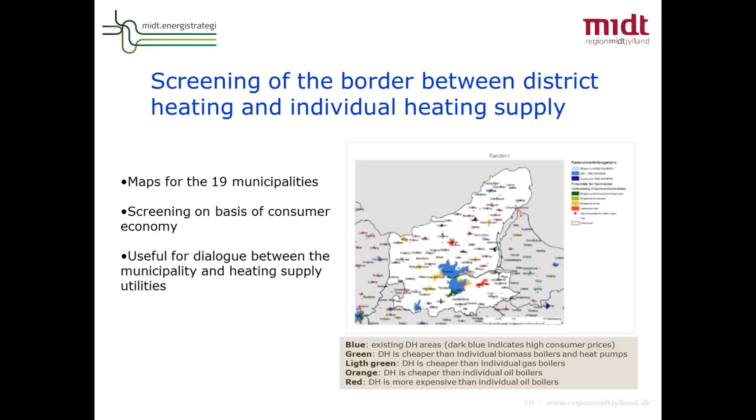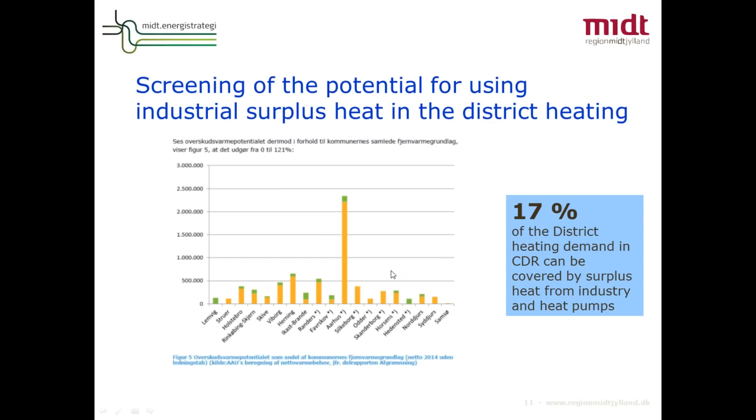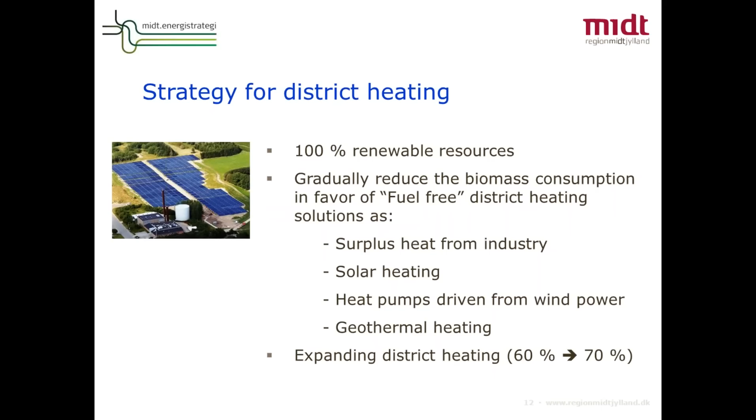You can also see in the strategy that we would like to expand district heating from 60% today up to 70% of the total heat demand within the region. We already have a lot of district heating, but based on the analysis and screening on consumer economy, it could be good to raise it further up to 70%.

The whole strategic energy project was called Spatial, and the conclusion is that if we take action as we have formulated in the strategy concerning district heating, wind power, etc., we will by the year 2035 reach a share of renewables of 70%. If we include wind power produced within our region but exported outside, we'll raise that share to 90%. This is quite good, and it is based on known technologies and mainly local resources, so I think it's quite interesting.

Another example of how we can manage to work as a region with no formal authority or role: we can facilitate, we can put people together, organizations together, municipalities, energy supply companies, and then we can facilitate this common energy strategy work.

Another example here is a new analysis we have made in the area of Viborg, because Apple is right now building a new large data center, and they have a lot of surplus heat from this data center.

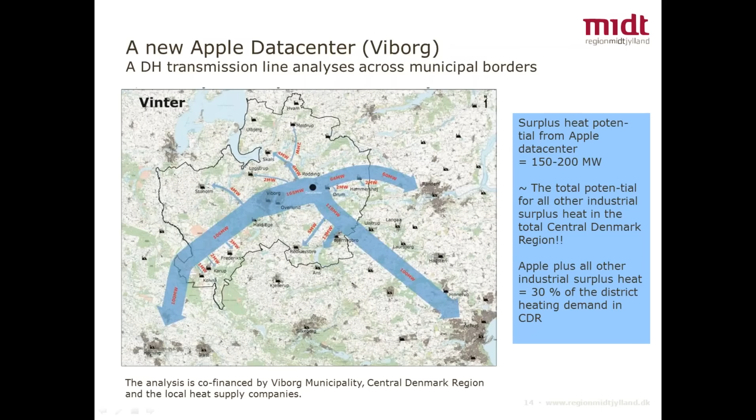If this heat should only be used in the city of Viborg, the closest city, they would perhaps be able to use 25% of the potential for surplus heat. We would like to use as much as possible, so the region has co-financed a transmission line analysis to investigate if some of the surplus heat could cross the municipal border to Randers, Aarhus or Herning, where they have large district heating systems. This is another example of how we as a region can help, since the municipality of Viborg alone does not right now have interest in using surplus heat in other municipalities, and that is why we as a region co-finance and take our part here.

Our latest developed project: the region together with 24 district heating companies has made an application for financial support from the EU. These 24 district heating companies are all fired by natural gas, and they are planning to invest in more renewable technologies within the next 3 years. To do so, they need technical assistance, calculations, etc., and together we have made this application for financial support to the technical assistance. We hope and expect that we can start this February or March, so we can help them increase their share of renewables, which will also increase the total share of renewable energy within the region.

This was what I wanted to explain to you about how we do work as a region with no formal role, but still we're succeeding with this way of facilitating and collaborating with important energy partners. Thank you very much.

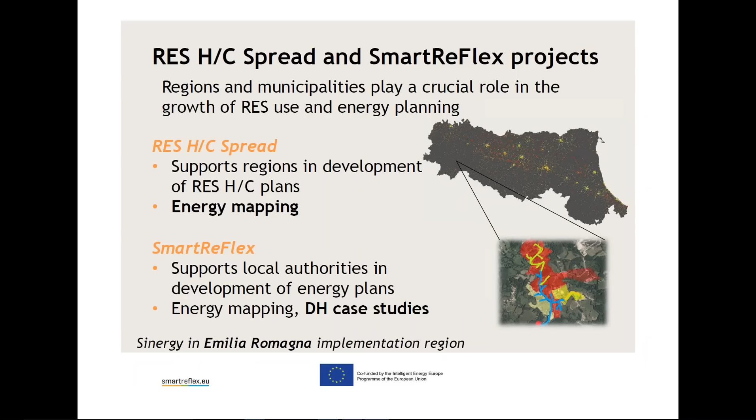I'm going to present briefly the results of this project, in which I was not involved, but which we used for our case study analysis.

That is the energy mapping of the region. The Agency for Environmental Protection and Energy, ARPA, developed maps of demand, of existing energy sources, and of potential renewable energy sources to be used.

Thanks to the overlapping of these two layers, it was very useful to find the most suitable areas in which renewable energy source plants could be built, particularly district heating.

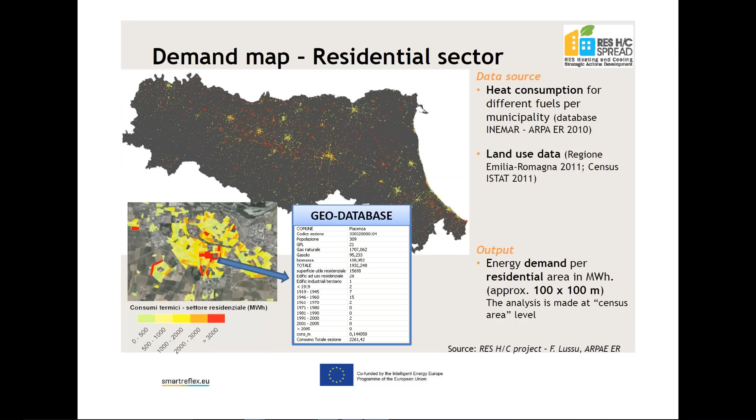What you are seeing now is the map of demand in the residential sector. The color scale, from green to red, highlights the energy demand intensity, made through analysis of fuel consumption per municipality, afterwards redistributed per the floor area of the residential sector.

The same analysis has been done for the tertiary sector, with the addition of the important anchor load buildings—buildings, particularly public buildings, with very large and steady heat demand that are really interesting as consumers for district heating plants.

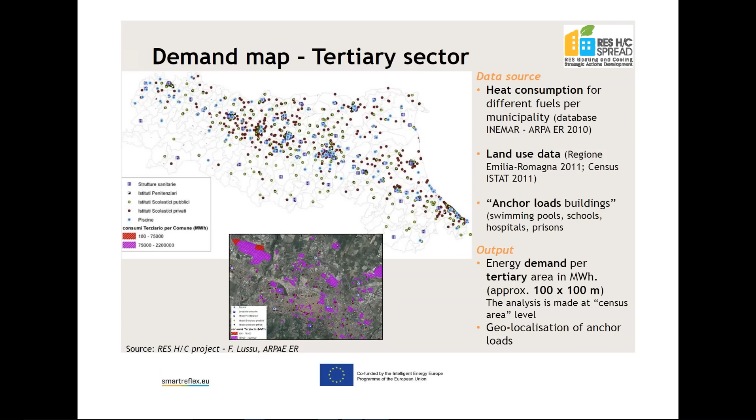Basically all industrial activities, companies and energy production plants have to ask for authorization from the Environmental Protection Agency, and to monitor their pollutant emissions and energy consumption every year.

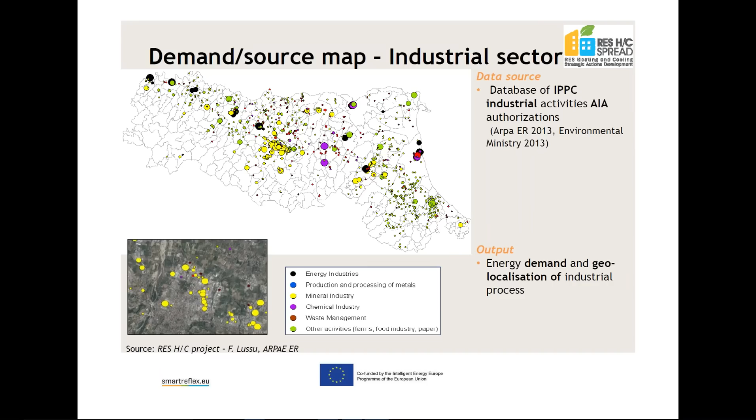Industrial activity has lots of waste heat that could definitely be recovered thanks to district heating.

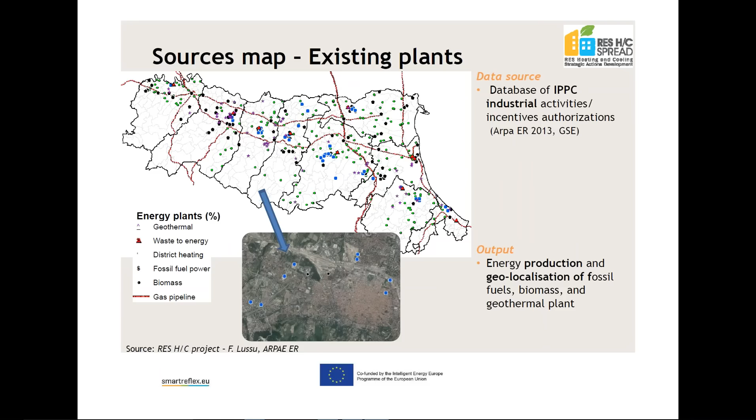As I mentioned, a map of the existing plants was made, and the last effort was to map potential new energy sources, particularly renewables, that could be used in the heating and cooling sector.

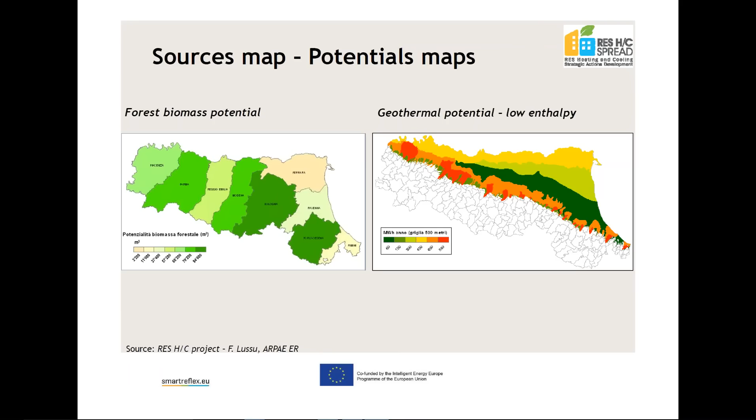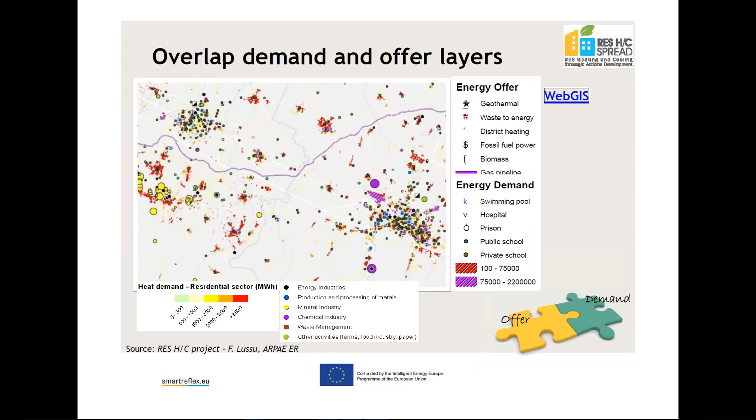So after obtaining all these maps, overlapping them and looking at local scale, it definitely shows up some areas in which synergy between demand and possible new energy sources could be very interesting and exploited thanks to district heating. So we used this data in our project, SmartReFlex, to properly size and analyze some pilot case studies.

Some case studies of pilot plants that we hope will really be implemented after our analysis. I would say I'm sure about that.

What I'm going to show you now are two examples of the case studies we have done. Looking at the mapping, you can see the mapping of the region at a local scale, a sort of zoom of the result of the previous project, here in this small town.

That is Mirandola. The case is about the extension of an existing district heating system, in which the local authority, together with the utility running the existing system, is planning to extend the district heating and use renewable energy sources in order to reduce their dependency on fossil fuels and on their unpredictable price.

This is quite a nice example of integrated urban planning and energy planning. After that ruinous earthquake affected the area in 2012, the city is undergoing a big renovation of the damaged areas, especially in its historical center. So the district heating line is foreseen to be extended in this area and to be the only way to serve the heating and cooling sector here.

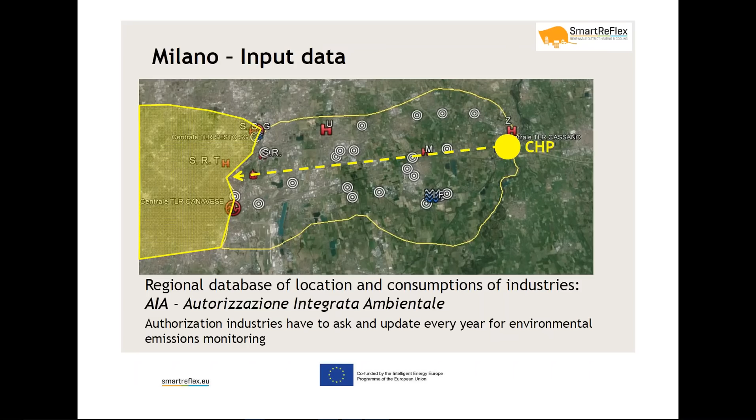So what we did was map the waste heat potential recovery along the connection. You can see here, from the right the CHP plant, and on the other side the city of Milano. We selected an area in which the district heating connection could potentially pass, mapped all the industries, and thanks to the same methodology used in the RES H/C SPREAD project, we mapped all the consumption and tried to estimate all the potential heat recovery.

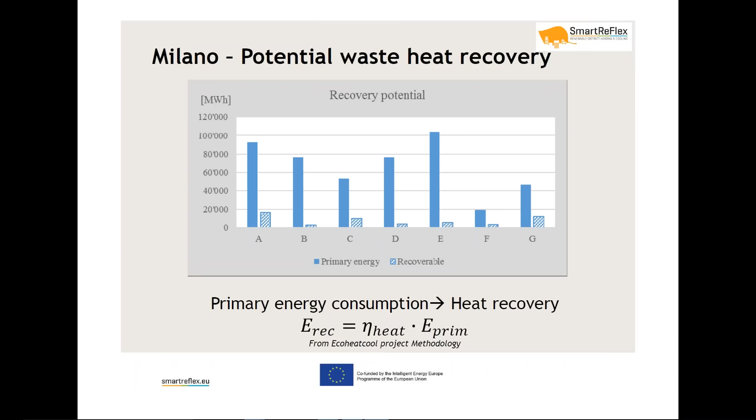Here you can see, for every industry labeled with letters, just some examples. We estimated the potential recoverable heat - not only the waste heat, but also the technical fraction recoverable in the district heating line, taking into account technological issues and temperatures. We tried to estimate the potential heat recovery this district heating line could have, depending on the path from the plant to the city.

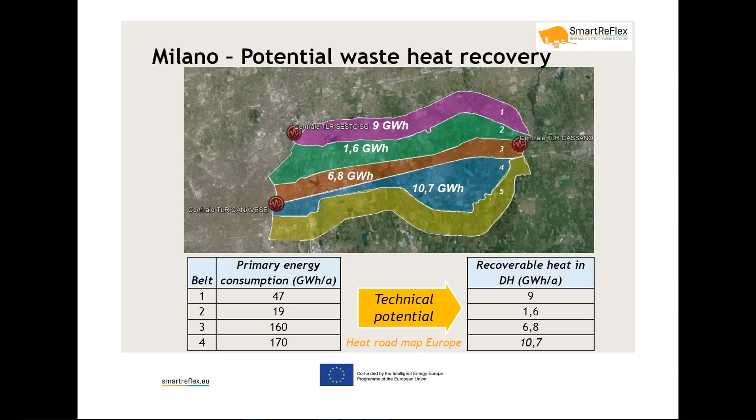As you can see, the numbers are quite interesting, even if with regard to the needs of the city and what the current district heating system is serving, about 1 terawatt-hour, it's not much. So the region is thinking about whether it would be interesting to recover this in the district heating line, or more likely initiate new local initiatives. That was the result of the synergy between these two examples. Just to conclude, the mapping results will be available on the web in the next months, and that's it.

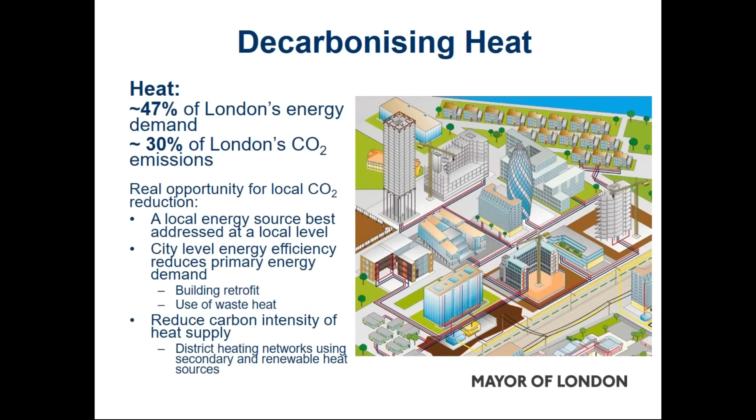We've done a lot of spatial mapping to understand where within London district heat networks are the most carbon- and cost-effective way of supplying heat. We don't expect heat networks to cover the whole of London, but we have priority areas where we expect to build them out because they're the most cost-effective and carbon-effective way of supplying heat. But we have parts of outer London where we don't have the same level of heat demand, where there will be alternative sources of heat supply.

Just very quickly, a recap on some of the programs we've undertaken historically to get to where we are. We started out by developing a heat map that looked at heat demand right across London, and that's the picture on the right you can see there.

The redder the colour, the higher the heat intensity, the heat density. That also looked at heat sources. Historically, we didn't really think so much about secondary heat or waste heat sources, so that's predominantly generation and heat sources. But as you'll hear as we go through the presentation, we've updated that information with the outcomes from our secondary heat study. Out of that heat map, we also developed energy master plans.

I mentioned we have 33 London boroughs. We work with those boroughs to develop their energy master plans, looking at a local authority level how energy systems will develop within that borough, where the opportunities for district heating are, what the network routes might be, and what planning policy they might want to integrate into their planning documents to ensure they stand the best opportunity of realising the opportunities heat networks offer. We also had a decentralised energy project delivery unit that provided technical, financial and commercial support to develop projects and take them to market, so we had investable projects we could get funded to deliver.

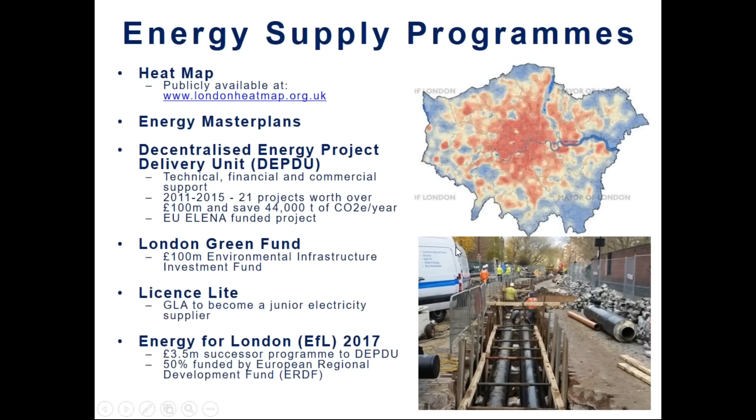And we're just in the process of developing out a successor to our decentralized energy project delivery unit, which is starting up this year, and that's basically doing something very similar, technical, financial, commercial support to develop that project.

I mentioned we were part of the Celsius project, which is a really important project for us. It was actually the instigator behind the work we've done around secondary heat and waste heat sources. It started in April 2013, running through to the end of this year, December 2017. The main aim is to help accelerate the rollout of district heating and cooling systems across the EU, with a strong focus on waste heat, and that's what got us thinking about what the opportunities were in London.

We're looking to address technical, political, economic and social barriers. We're also looking to play a role in illustrating how district heating networks and district energy can play a role within a wider integrated energy system, and help us get towards a zero carbon energy system, the role it can play in a city.

The Celsius project is delivering innovative demonstration projects in 5 partner cities, all utilising different types of waste heat. In London, we're utilising waste heat from the tube. In Cologne, one of our partners, they're utilising waste heat from sewage systems.

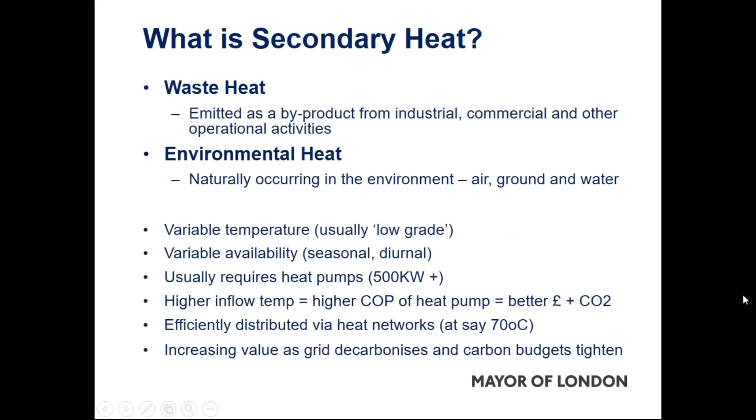Why use it? Because in combination with renewable energy, it will increasingly replace fossil fuels right through to 2050—long-term viability of heat networks, and it provides new heat sources for heat networks to utilise. That's really important for us, so that we've got heat networks taking different heat sources, reducing primary energy demand and CO2 emissions, because we're not driving additional generation activity.

It increases our energy security and self-sufficiency within the city. We're utilising the energy available within the city more effectively, so that we don't have to make such a large demand on primary energy sources upstream, and it contributes significantly to improved air quality and reduced emissions.

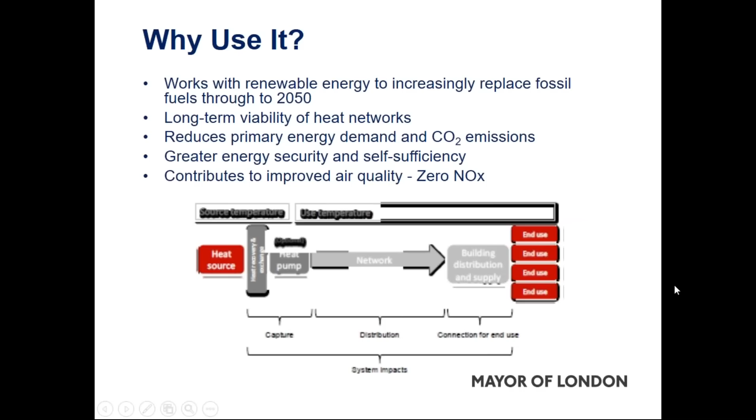The objectives of the report were to try to quantify the availability, the cost of that energy, and how we might be able to use it. We also wanted to understand the issues around integration with heat networks and buildings—how we could actually integrate that into a heat network and use it.

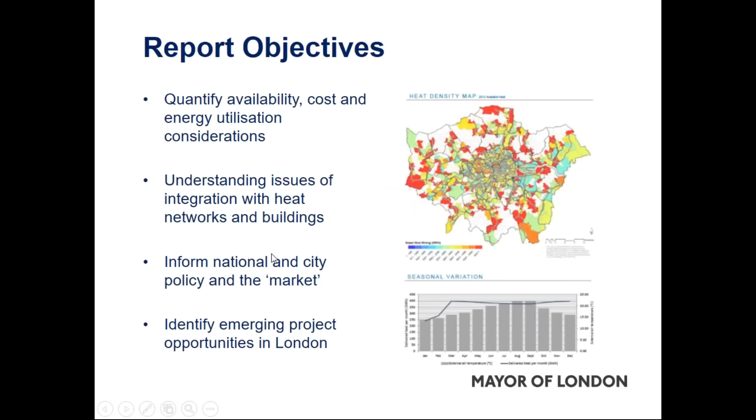We wanted to inform both city-level policy and national-level policy to gain support for waste heat and the role it could play in decarbonising systems, and also to start identifying opportunities for integrating waste heat into district heating projects in London.

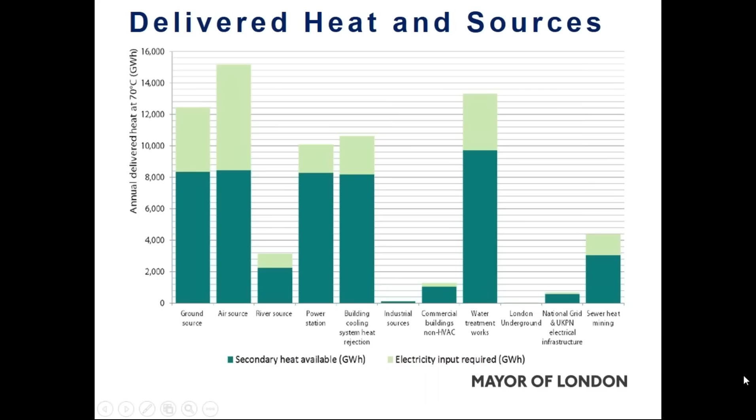This gives you an indication of the types of heat we have, the sources, and the size of that heat. The dark green is the secondary heat available itself in the study, and the electricity input required to elevate that to a 70 degree temperature is the light green. You can see we've got a range of sources—environmental sources on the left of the screen, and waste heat sources such as power stations, industrial activity, water treatment works, sewer heat mining.

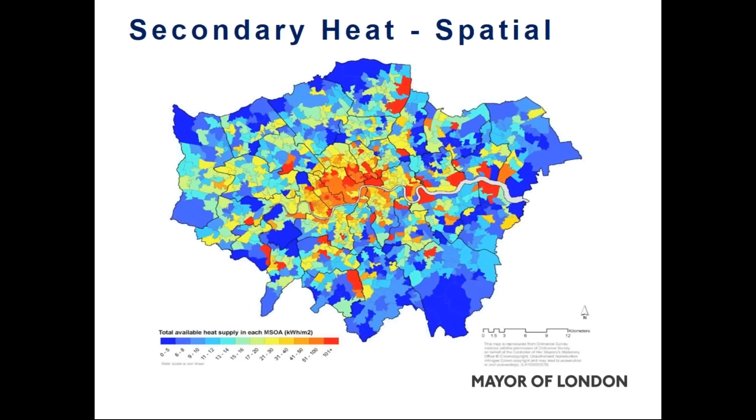We then looked at a spatial representation of that heat—how much we have across each of those different sources and where it is across London. The important thing for us was to see how that overlapped spatially with the heat demand in London, and actually it mirrors heat demand quite closely. That's a positive for us, because the further we need to transport our heat, the more costly it is. You can see from the blue where we don't have much heat, through to the red where there are significant amounts of heat available.

So I've shown you some of the types of heat we identified within London, the spatial spread of that heat, and here's a few examples of how we might be able to recover that heat and integrate it into a heat network.

For example, in the tube or metro tunnel, Islington Council are looking at integrating waste heat from the tube into their heat network. There's a ventilation shaft where warm air is expelled from the tube into the atmosphere, and what we're doing is putting a heat exchanger into that shaft to take the heat out, then use a heat pump to elevate that temperature, and put it into the heat network.

As an example, waste heat from the tube is somewhere between about 20 and 28 degrees depending on the season, and we need to elevate that up to about 70 degrees, which is where we're looking to get it for the heat network.

As another example, electricity substations and transformers generate significant amounts of heat as they work. They need to be cooled, and we're looking at how we might capture that waste heat and use it as well, including how you can modify transformers to make it as easy as possible to capture that heat and integrate it into a heat network.

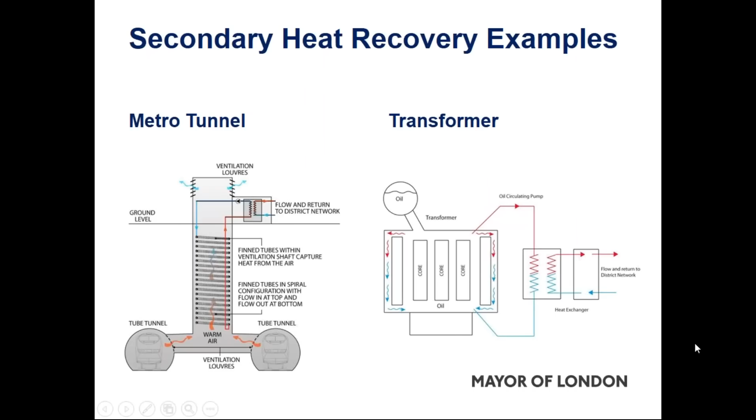From all these examples, one of the things we've certainly learned is how easy it is to access that waste heat and integrate it into a network. And just a couple of things around performance.

There are two things that will influence the performance of heat pumps. One is the temperature of the waste heat - the warmer the waste heat, the better the coefficient of performance to get it up to our 70-degree target - and also the operating temperature of our heat networks.

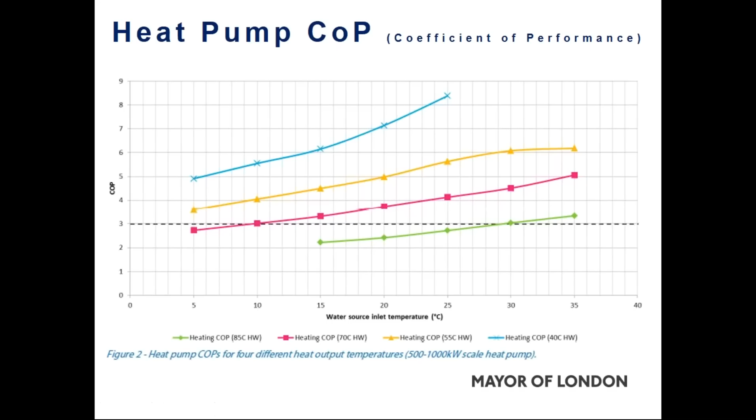You can see from the lines: the blue is a heat network operating at 40 degrees flow temperature with much higher coefficients of performance, the green is one operating at 85, the pink at 70, and the yellow at 55. So it's really important for us to identify heat sources and their temperatures, and if we can lower the temperature of our heat network, that makes it far more carbon and cost effective to integrate those sources.

Just to summarize some of the key findings from this study: low-grade waste heat is mostly from secondary heat sources, and it needs upgrading to be put into a heat network using heat pumps.

Generally speaking, we're quite well matched spatially between availability of waste heat locations and our heat demand, so hopefully they will overlap well with our priority areas for heat networks. Benefits are optimized when you can lower the operating temperatures of your heat networks.

Traditionally we had 90-degree heat networks. We're looking to reduce that down to 70. If we can drop that a little further, we won't need to increase the temperature of waste heat as much to put it into the networks.

Also, when thinking about supplying buildings, there's the relevance of lowering temperatures and the impact that might have on thermal comfort. In the UK we have energy performance certificates, and if you were to elevate a building from a level E grading to a level D rating, that would allow us to provide 96% of the heat demand if it was supplied by a heat network operating at 55 degrees.

Without that improvement in insulation on the building, we'd probably only be able to meet about 70 to 75% of the annual heat demand. So it's important to think about not only the temperature of your heat networks, but the thermal performance of the buildings you're supplying.

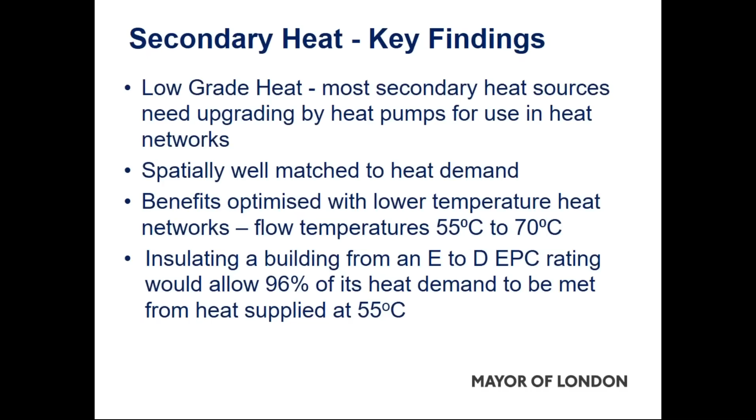London's 2010 heat demand overall was 66 terawatt hours per year, and from the study we've done, secondary heat sources could provide up to 71 terawatt hours of heat. That's made up of 50 from the heat sources themselves, and another 21 from electricity required by the heat pump, to supply a heat network operating at 70 degrees.

We also looked at how competitive that was with other sources, using conventional gas boiler heating as the counterfactual, since that's the main one for the UK. About 12 terawatt hours of secondary heat can be considered cost effective, mainly from industrial waste heat because we don't need to elevate the temperature there, and that's about 18% of London's heat demand already cost effective. That's really encouraging for us to think about how we get our networks in place to use that.

Then 56 terawatt hours of secondary heat is considered carbon effective - that's the amount of carbon associated with that heat and its elevation to 70 degrees - equivalent to 82% of London's heat demand. So we can see a significant amount of London's heat demand could be met in a carbon efficient way from secondary heat sources, and nearly 18% for cost effective already. Hopefully as technology improves, we'll be able to source increasing amounts of waste heat.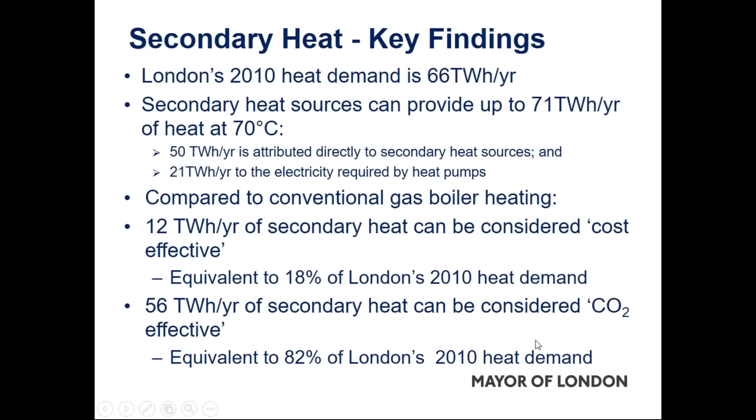That's a very important element for us, because we see district heating playing a very significant role in decarbonising our heat supply. We need to transition from high and medium carbon heat sources to low and zero carbon heat sources. That information is all being integrated into London's spatial heat map, so we can use it to inform our district heating master plans and things like that. That's everything from me, thank you very much.